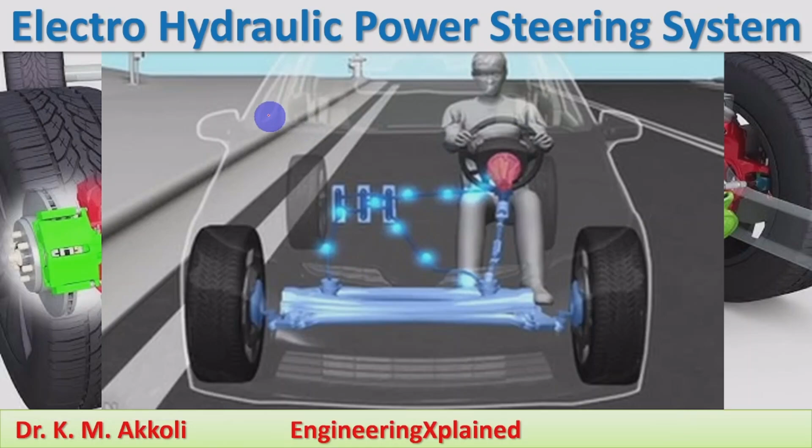In this session, I am going to discuss the working of the electrohydraulic power steering system. In the previous sessions, I have already covered the working of the hydraulic power steering system and the working of the electric power steering system. Here I am going to take the combined advantage in this electrohydraulic power steering system, which will be more beneficial than the hydraulic power steering system and the electric power steering system. How it will be, we are going to discuss here.

First, we'll take the different components of this type of power steering system, then its animation, and later how the working takes place. These are the components of the electrohydraulic power steering system: the steering torque and angle sensor, electronic control unit, pressure sensor, solenoid valve, accumulator, motor, pump, oil tank. These are the major components of this electro-hydraulic power steering system.

Here the motor is used to run the hydraulic pump. Instead of running the hydraulic pump by directly coupling it to the engine, here the electric motor is used for running the pump, which supplies the fluid power to the steering system, and that motor is controlled by the electronic control unit.

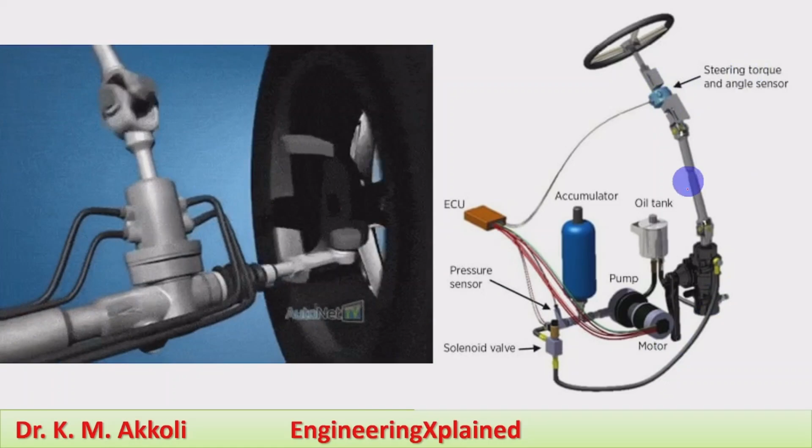The electronic control unit precisely controls the speed of the motor based on the torque given through the steering by the driver and the speed of the vehicle. The speed of the motor controls the flow rate of the fluid in the hydraulic circuit, and thereby the combined effect we get will be more efficient, with more precise control.

Here we can see the hydraulic power steering system, the fluid which is supplied to the steering system, and how the steering and turning take place in this animation. It is the same as the hydraulic power steering system, but the power required to pump the fluid is controlled by the electronic system, and that's why it is called an electro-hydraulic power steering system.

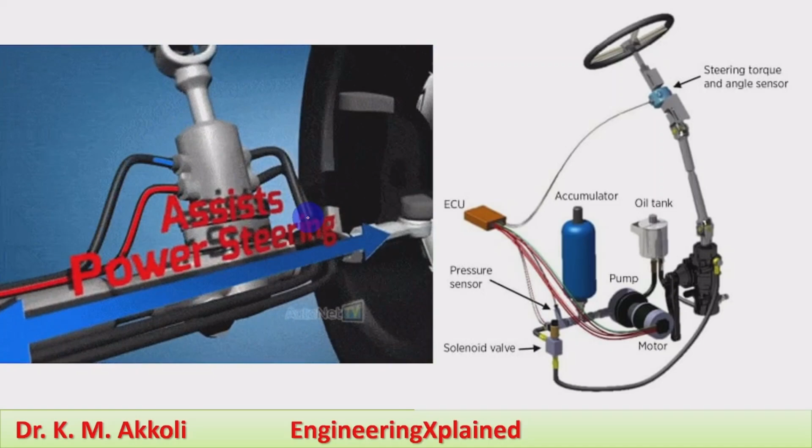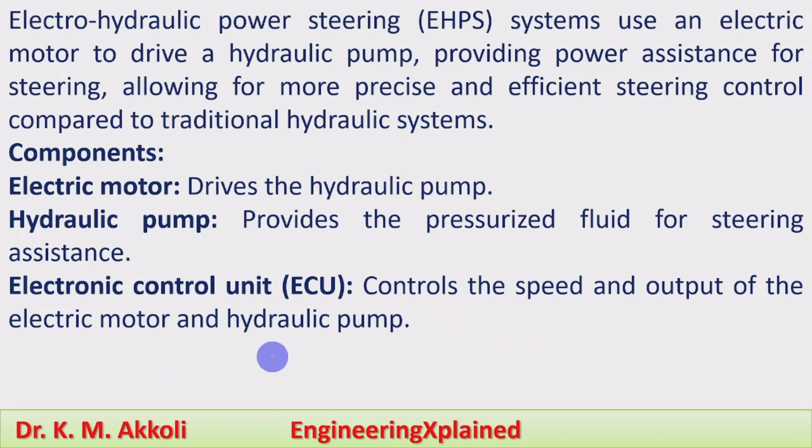Electro-hydraulic power steering (EHPS) systems use an electric motor to drive a hydraulic pump, providing power assistance for steering, allowing for more precise and efficient steering control compared to traditional hydraulic systems. Components: the electric motor drives the hydraulic pump. The hydraulic pump provides the pressurized fluid for steering assistance. The electronic control unit (ECU) controls the speed and output of the electric motor, and thereby controls the hydraulic pump. Steering rack: the mechanical system that translates steering wheel input into wheel movement.

How it works? Electrohydraulic power steering systems combine the advantages of electronically controlled, demand-based steering with the robust hydraulic actuation of traditional systems, combining both effects. An electric motor drives a hydraulic pump, which then provides pressurized fluid to assist the steering rack.

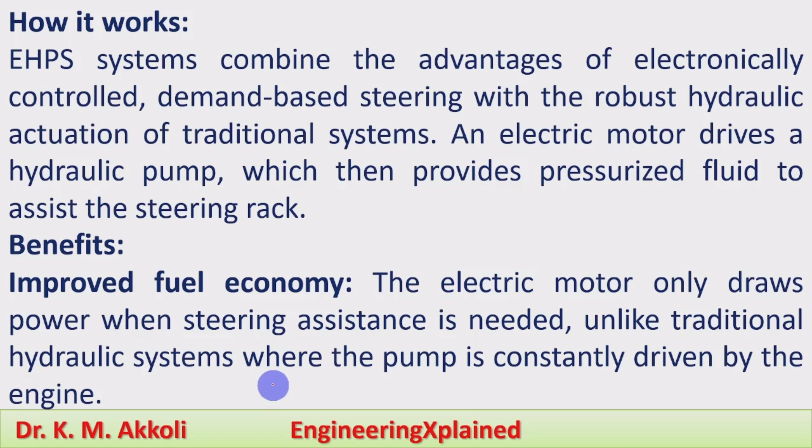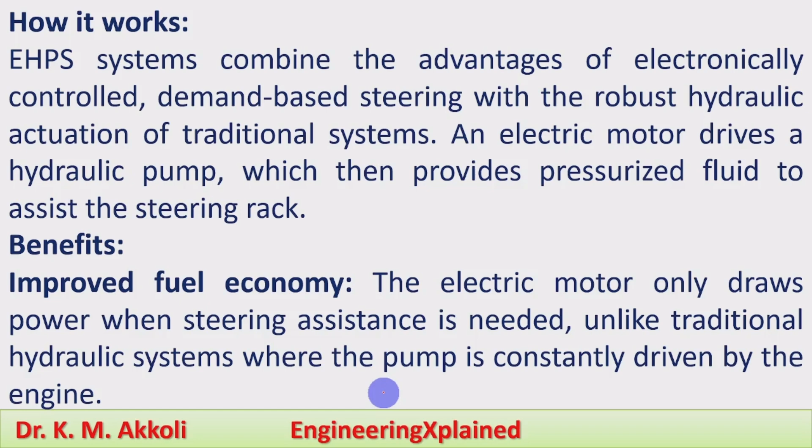Benefits: improved fuel economy. The electric motor only draws power when steering assistance is needed, unlike traditional hydraulic systems. In traditional hydraulic power steering systems, the pump which provides the pressure in the hydraulic system is coupled directly to the engine, so pressurized fluid is always in the system, and that draws power and reduces the efficiency of the engine or vehicle. Here the motor is only on when assistance is required, and only then is pressurized fluid supplied in the system, so less power is consumed and fuel economy is improved, whereas there the pump is constantly driven by the engine.

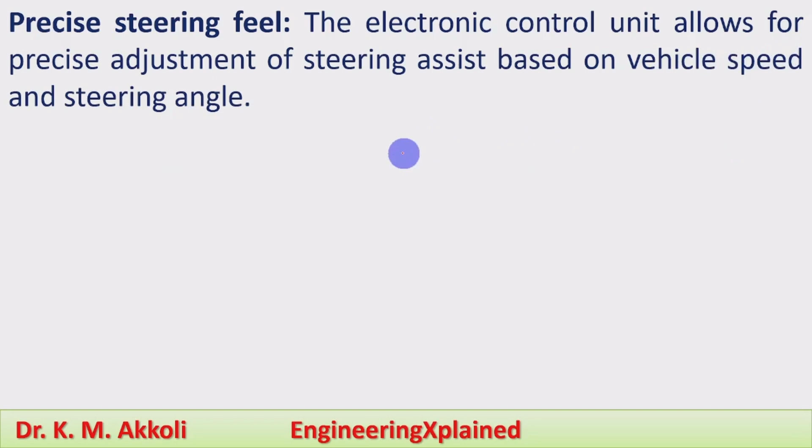Precise steering feel. The electronic control unit allows for precise adjustment of steering assist based on vehicle speed and steering angle. Reduced emissions. Improved fuel economy translates to lower CO2 emissions. Enhanced comfort. Steering becomes lighter at low speeds and firmer at high speeds, improving the overall driving experience.

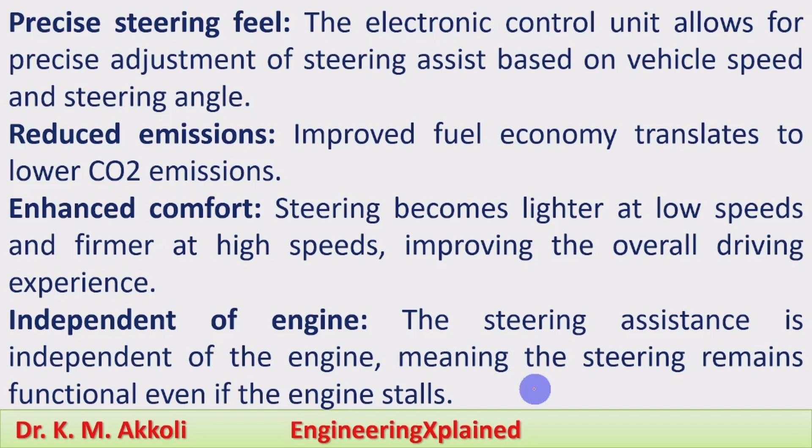Independent of engine: the steering assistance is independent of the engine, meaning the steering remains functional even if the engine stalls. In the hydraulic steering system, only when the engine is running is pressurized fluid in the system, and thereby the steering effect is there. When the engine is stopped, there is no pressurized fluid in the system and no steering assistance takes place. But in this electrohydraulic power steering system, power is drawn from the battery to run the motor, which runs the hydraulic system, so it is independent of the engine running. Even though the engine is stopped, we can have the steering effect.

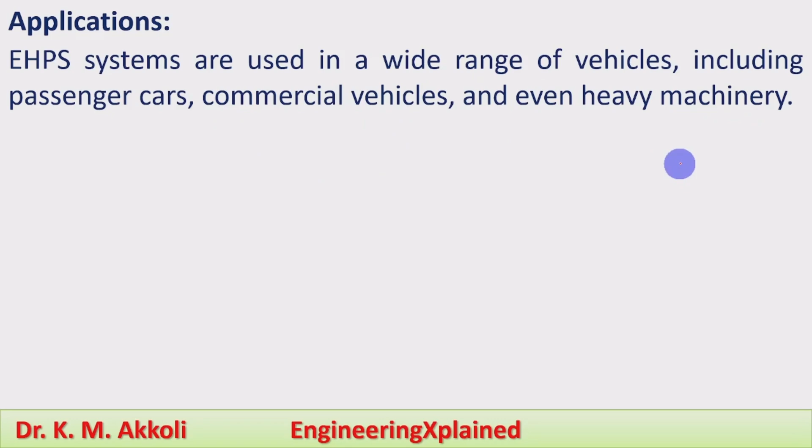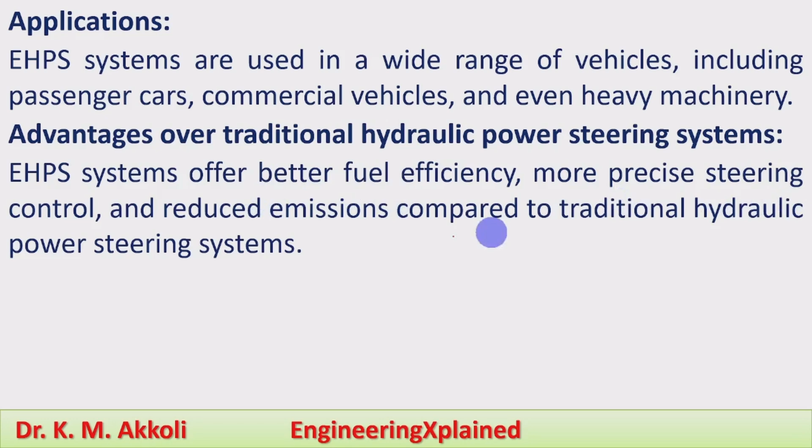Applications. Electrohydraulic power steering systems are used in a wide range of vehicles, including passenger cars, commercial vehicles, and even heavy machinery. Advantages over traditional hydraulic power steering systems: electrohydraulic power steering systems offer better fuel efficiency, more precise steering control, and reduced emissions compared to traditional hydraulic power steering systems.

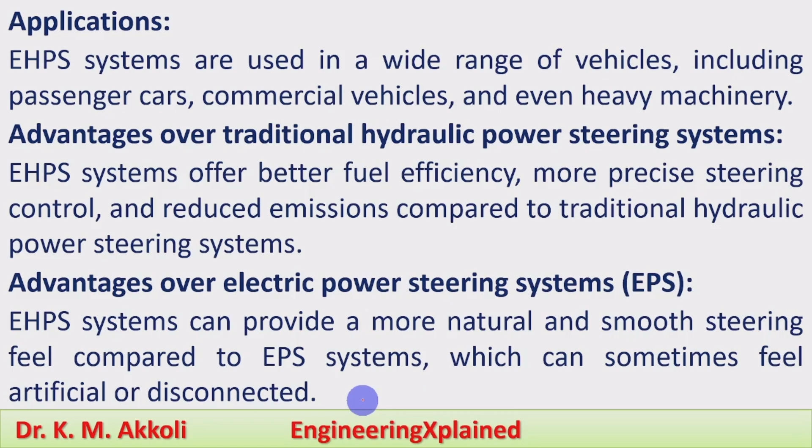Advantages over electric power steering systems (EPS): EHPS systems can provide a more natural and smooth steering feel compared to EPS systems, which can sometimes feel artificial or disconnected. Electric power steering systems sometimes feel artificial or disconnected, but the electrohydraulic power steering system provides a natural and smooth steering feel. This is about the electrohydraulic power steering system.